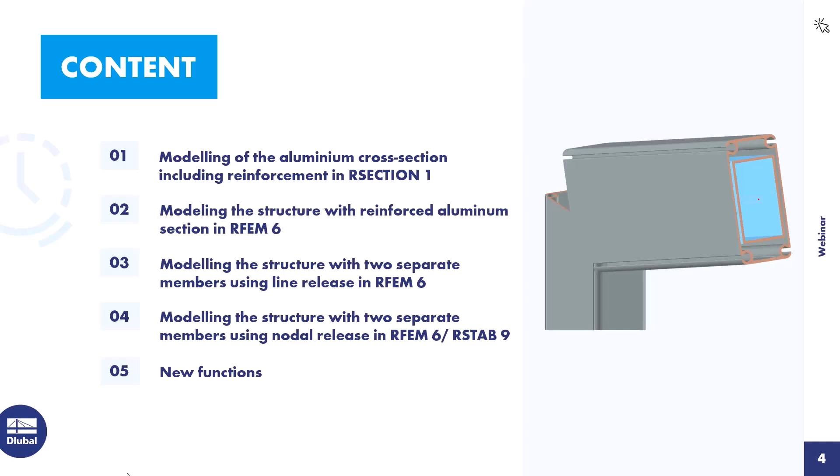This brings me to the first point, the modeling of the aluminum cross-section including reinforcements in RSECTION.

The cross-section geometry is available in DXF format, so I can use the import function. The creation of cross-sections based on DXF files was the subject of a previous RSECTION webinar. You can find this webinar on our website or on YouTube. There's also a knowledge base article on this topic on our website.

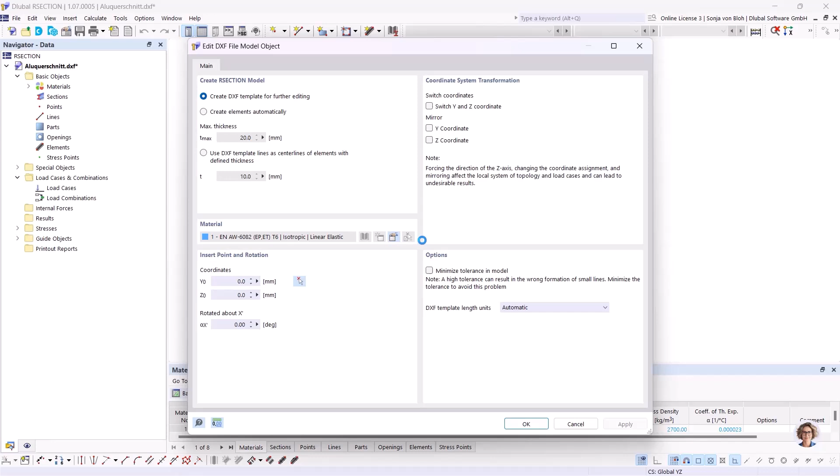I start the import process via File, Import, DXF. Then I choose the corresponding DXF file and click on Open. In the import dialog, I select the option Create DXF template for further editing, and then click on OK. Now the lines of the DXF file will be created in RSECTION.

I first create the part using the function select boundary. Here I have to define the material - I want to use the material that's already chosen in this box. Then I click on OK and click on the corresponding line. The part is now created.

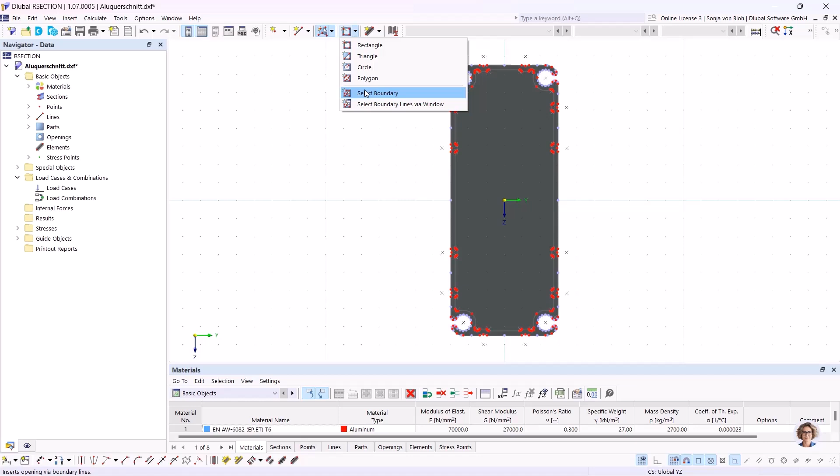Now I have to create the opening. For this, I select the function available for openings, select boundary, and then click on the corresponding line. I then deactivate the display of the parts and openings to get a better overview.

I then create the elements necessary for the classification and calculation of the effective cross-section. To do this, I only model a quarter of the cross-section, and then create the other parts by mirroring. To do this, I use the set centerlines function.

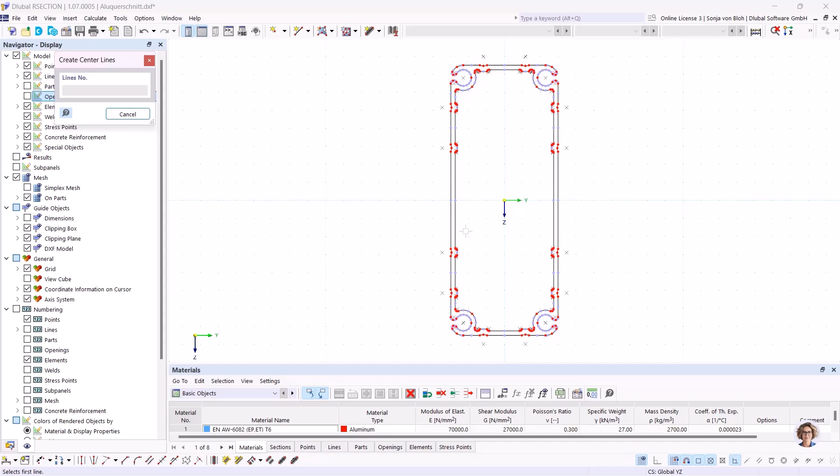I find this function here in this part. All I have to do is click on the two parallel lines, and the center line is then generated automatically. First I create the center lines for the flange, then for the arc, and then for the web.

The center lines then need to be extended. For this, I use the function extend graphically. Clicking on the left side of the line to be extended extends the line to the left; otherwise, to the right, until it intersects with the next line. I will extend this line to the left, and I also want to extend the center line of the web on both sides.

Since I only want to model a quarter of the cross-section, I trim the center lines accordingly. To do this, I use a function I find here called toLocation. This function makes it possible to extend or shorten a line to a specific location.

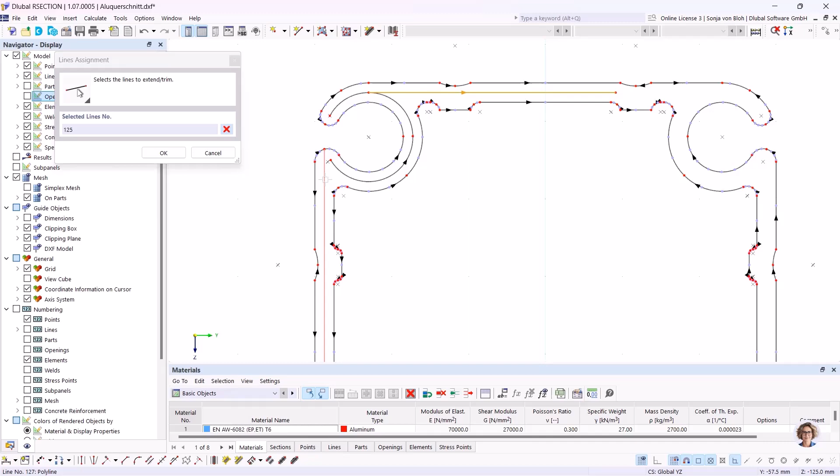I trim the center lines of the flange and the web to the center of the cross-section. To do this, I select these two lines, and then click on OK. I then have to specify the side of the line to be modified. The direction of the lines is shown on the working area. I have to shorten the end of the line, so I choose this option in the list box.

Then I have to define the location in this part here. I choose the 0 point here, and then I click on OK.

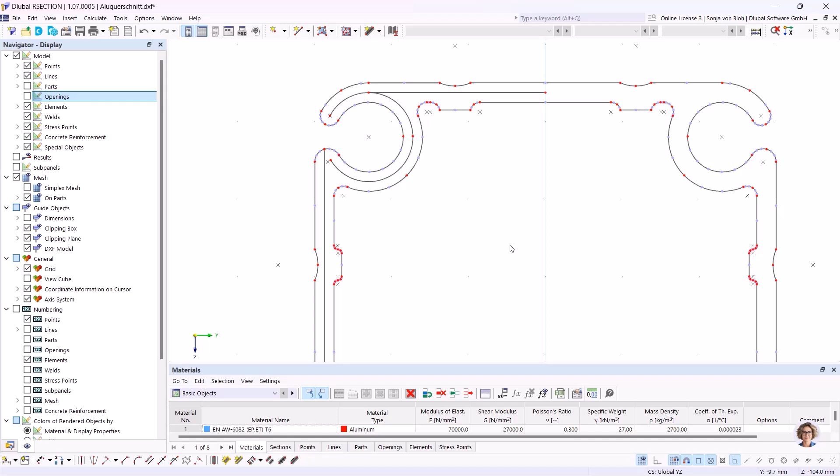Then the center line of the arc has to be connected to that of the web, and I make this connection with a straight line. For this, I create a new line and connect it here. I don't need this line here, so I delete it.

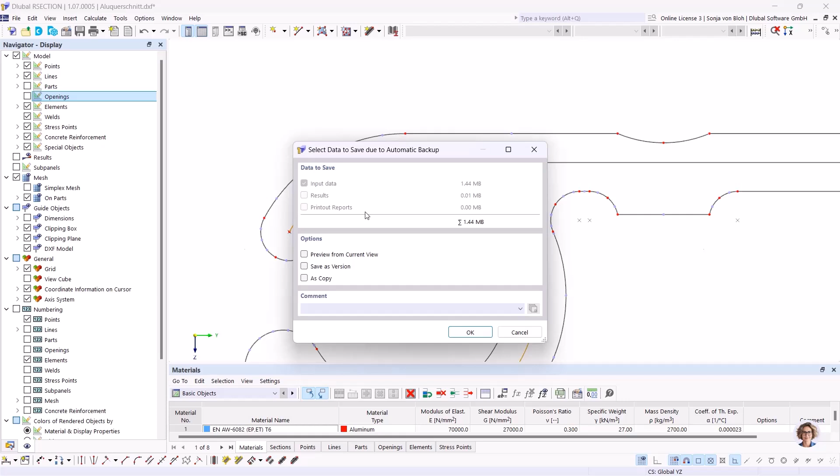Now, this line is not divided at this point, but this is necessary because elements are only connected if they share the same node. For this reason, I divide this line in this location. To do this, I use the function connect lines and elements, and I draw a window about this part, and now the line is divided at this point.

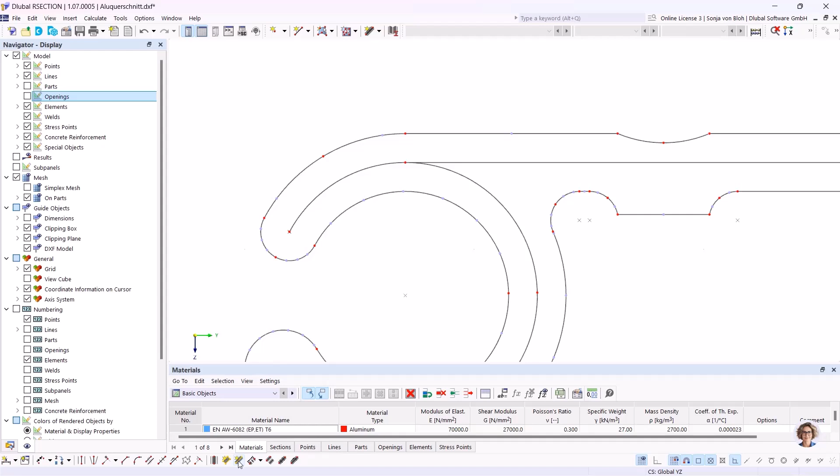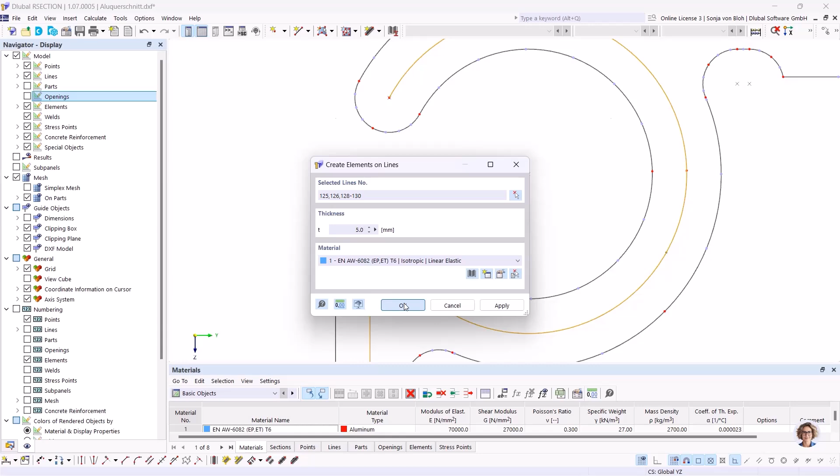I can now create the elements using the create elements on lines function. I find this function here, create elements on lines. All I have to do is select the corresponding lines. I select all the center lines. I click on OK, and then I have to define the thickness of the elements, and here I define 5 millimeters. Now the elements are created.

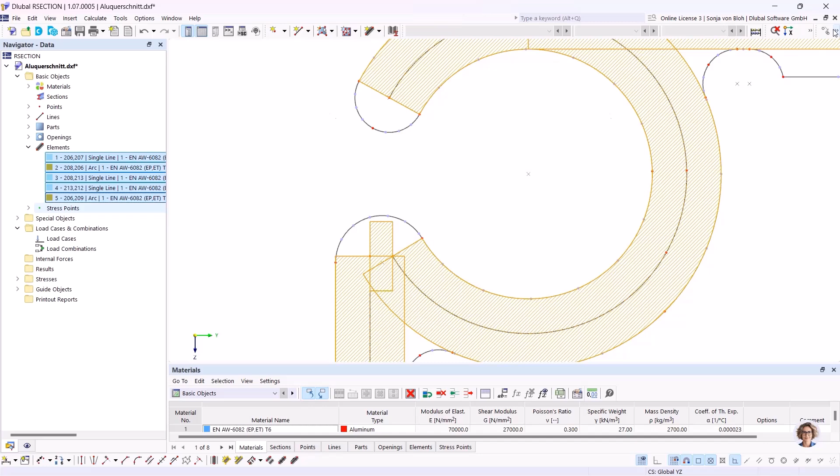I now select all elements here in Navigator Data, because I want to mirror them. For this, I choose this function mirror. I want to create a copy, so I activate this option. Then I have to define the mirroring axis. It's the axis Z, and the point, it's the 0 point. And I click on OK.

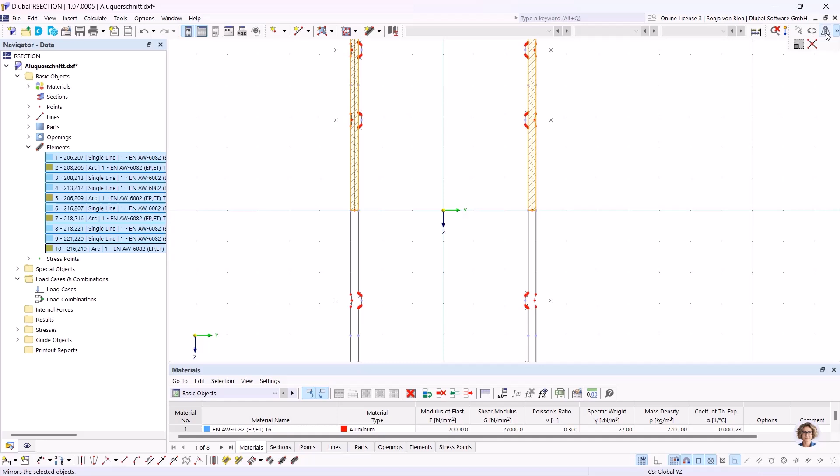Now the right part is created, and I need the part on the bottom. So I select all of my elements and I open the dialog mirror copy again, and I change here the mirroring axis to axis Y. And then I click on OK.

I then create the reinforcement. This consists of a welded rectangular cross-section made of S235 steel. I import this cross-section from the RSECTION cross-section library.

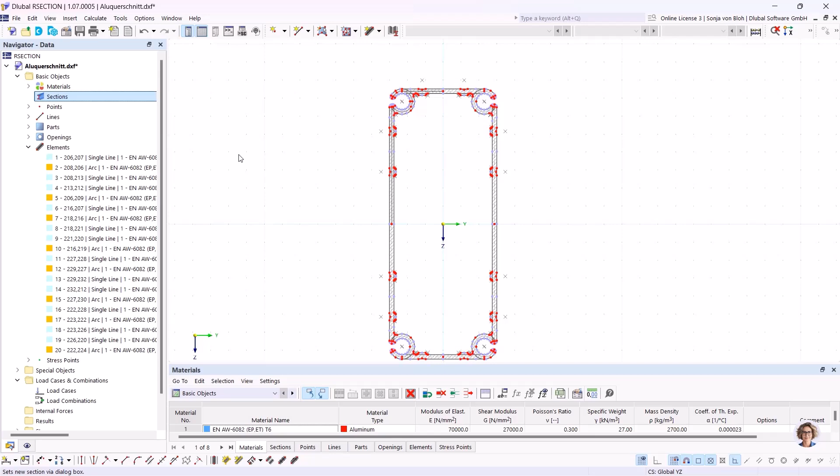To do this, I go to Navigator Data and choose here New Section. Then I open the section library and choose the rectangular hollow section. This should be a welded rectangular hollow section, so I choose here the manufacturing type welded.

I have also to create a new material. I want to use steel S235 for this cross section, so I create a new material, open the material library and choose here S235 from this standard. Click on OK.

OK, and then I have to define the geometry of this cross-section. Height is here 230 millimeters, and the width is 100 millimeters, and the thickness is 5 millimeters.

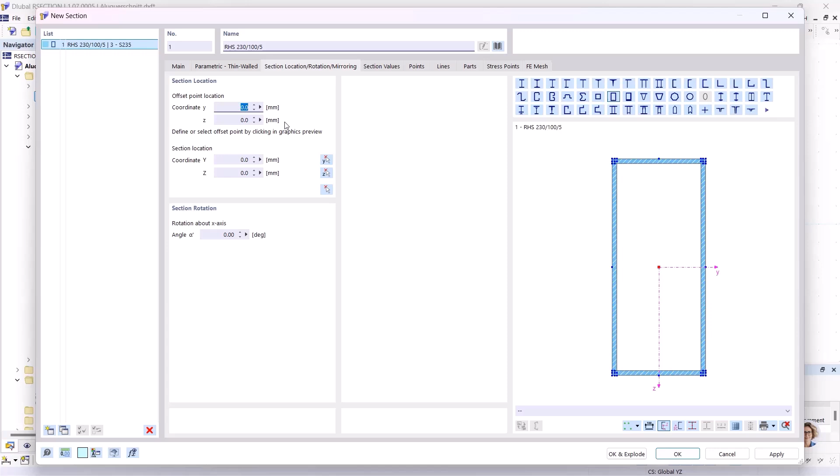In the tab section location rotation mirroring, I select here the 0 point as the insertion point, and I click on OK.

Only cross sections that are rigidly connected to each other can be imported into RFEM 6 or RSTAB 9. This connection is applied over the entire length of the member. If the cross sections are not connected to each other, the modeling presented here is not suitable. Two members would then have to be created in RFEM or RSTAB.

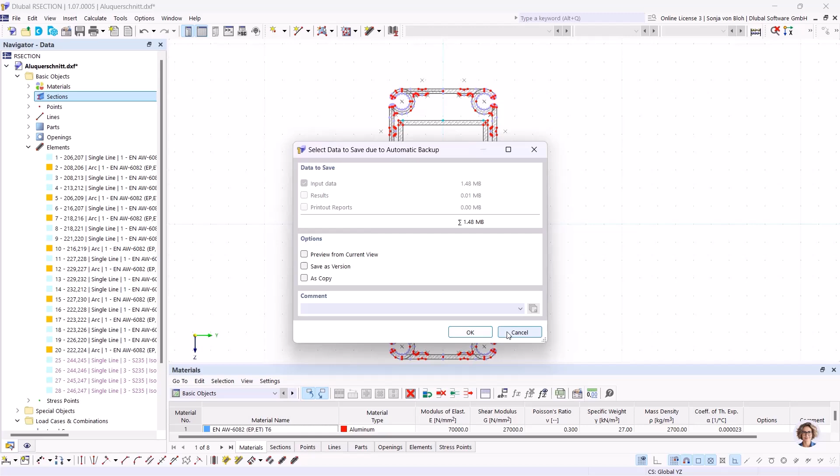As I mentioned at the beginning, I will also show this today. In order to connect the two cross sections, I have to explode the cross section into its individual objects. To do this, I choose here this cross section and choose here this function explode.

I create the connection between the two cross sections using an element with 0 thickness. To do this, I open here this function new element, define a thickness of 0 millimeters, and I have to also define an effective thickness for shear transfer, and this will be 5 millimeters.

Then I create the two elements.

In the base data, I open it here, I set the thin-walled analysis method. This is necessary because the connection of the two cross-sections was made using elements with zero thickness. These cannot be taken into account with a finite element analysis. The connection of the two cross-sections would have had to be made using parts.

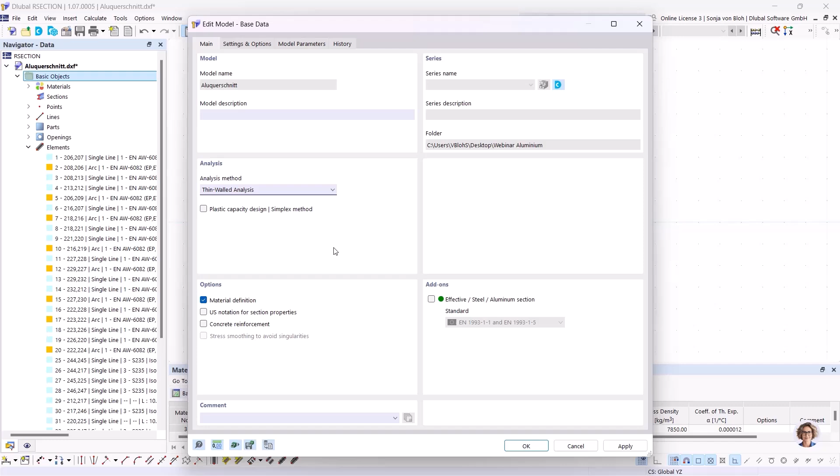It's advisable to start the calculation once in order to find possible modeling errors. Here, no errors will be found, so I save now this cross-section.

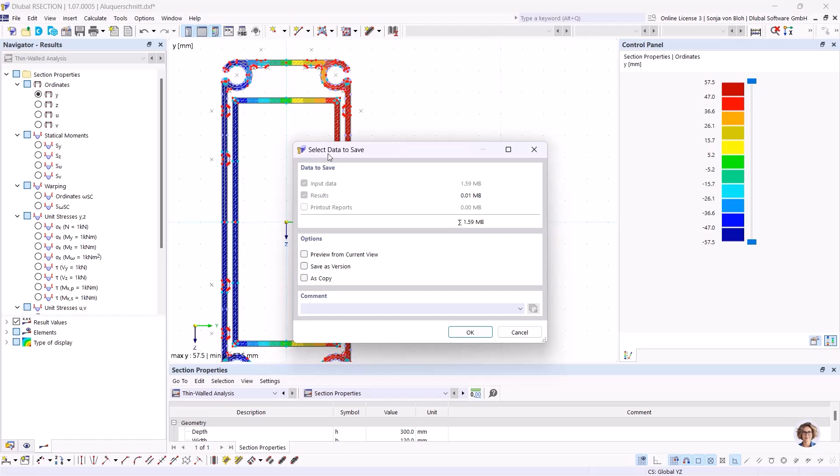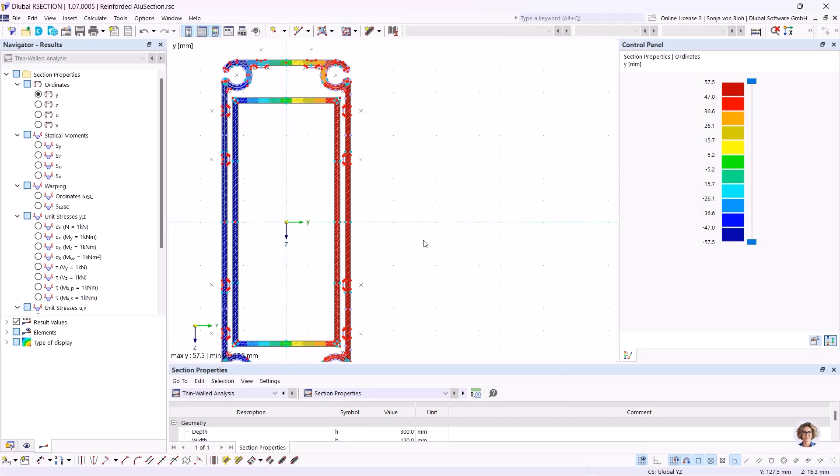I name it here reinforced Alu section. Then I can close this cross-section.

I now can model the structure in RFEM. So I open RFEM. Here I have already...

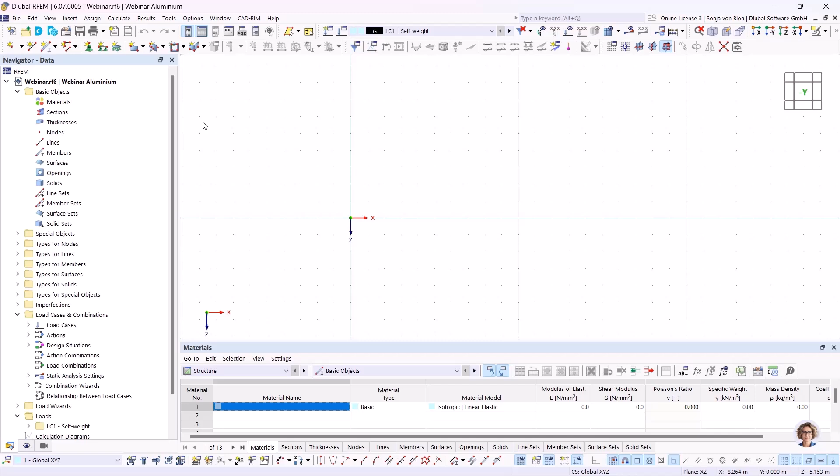Created a new file, and I have to import first the aluminum cross-section with the reinforcement that I've just created. To do this, I go to Navigator Data, choose New Section, open the section library from RSECTION, and I choose the reinforced aluminum section.

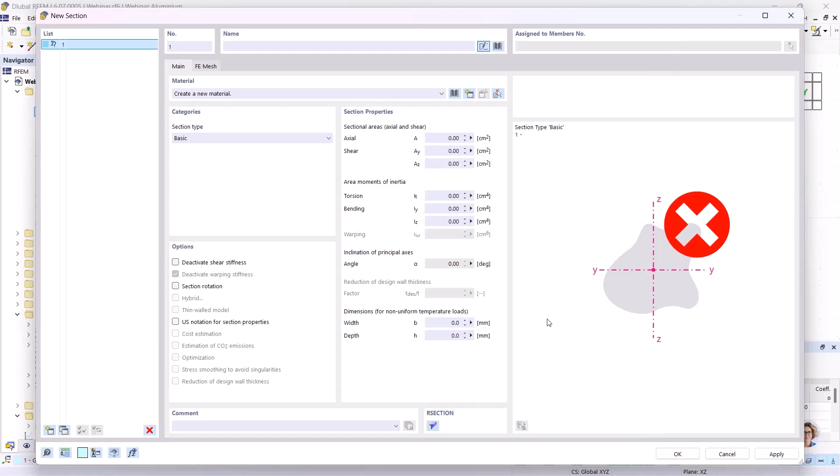I still need this cross-section without reinforcements, and for this I want to show you a new function in RFEM or RSTAB. It's now possible to open this cross-section in RSECTION and modify it, then import it again in RFEM or RSTAB.

To do this, I copy this cross-section and then I open this cross-section in RSECTION. In RSECTION, I then delete the steel cross-section and the connection between the steel cross-section and the aluminum cross-section.

Then I start the calculation again to see if there are any errors. There are no errors, so I can save this cross-section.

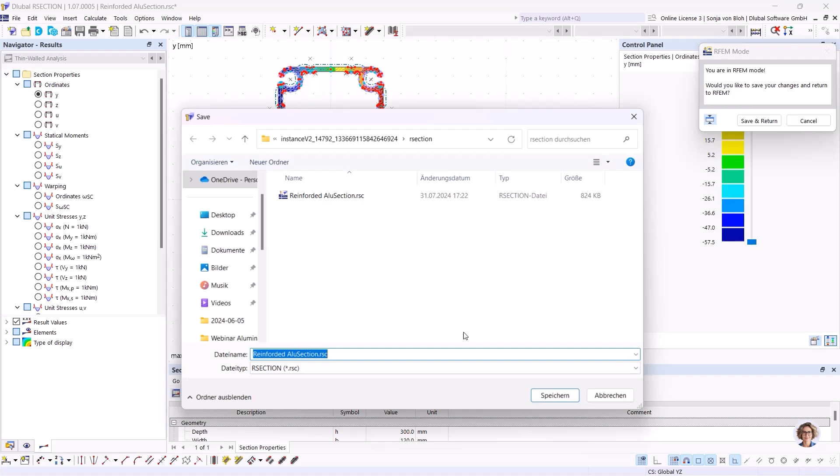I want to save this cross-section also on my disk, so I choose File, Save As, and I change the name to Alu section, and then I save this section on my disk.

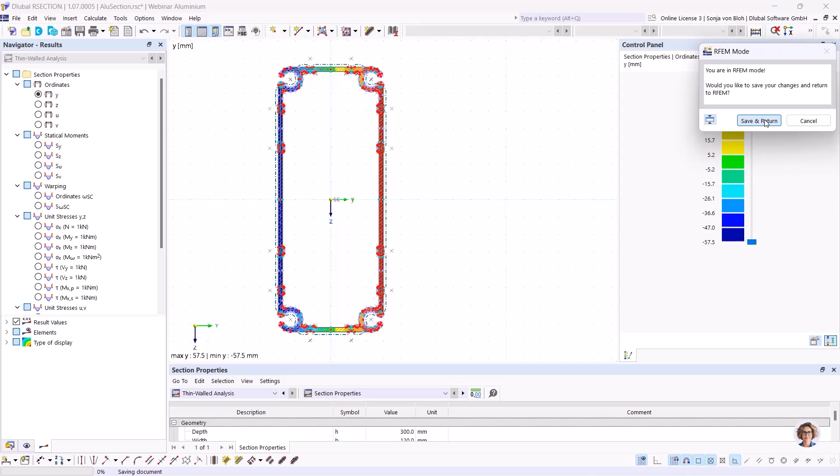Then I save this section. I go to Save and Return to RFEM, and by clicking Save and Return, I also apply this change in RFEM.

You can see now this cross-section is without this reinforcement, and this cross-section includes this reinforcement. If I had just clicked Save and Return, only the cross-section would have been changed in RFEM, but the original status of the cross-section would have been left on the hard drive. Then I click here on OK.

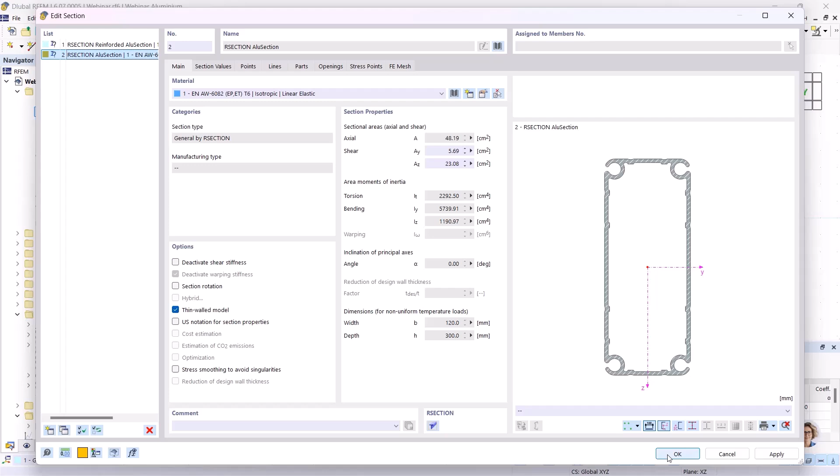I then model the column with the unreinforced aluminum cross-section. I choose New Member, choose the aluminum cross-section, and then I define the column with a height of 6 meters, and I model the beam with a length of 8 meters.

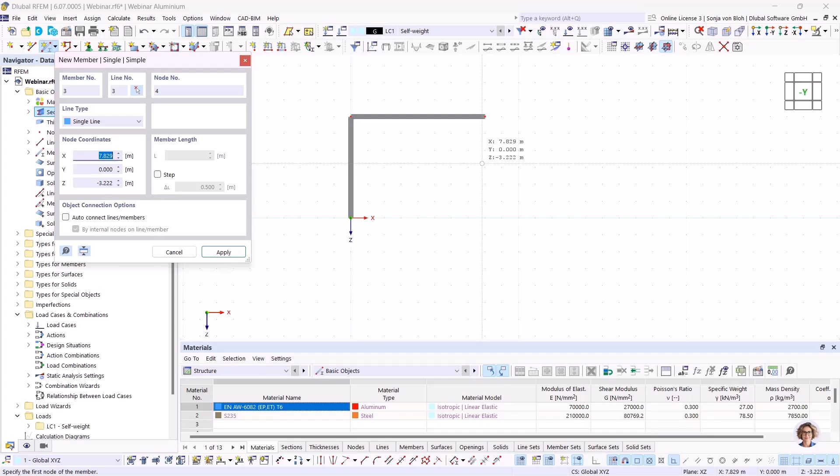The roof pitch is 18 degrees, so I use the function chamfer. I find this function in menu Edit, Manipulation, Chamfer.

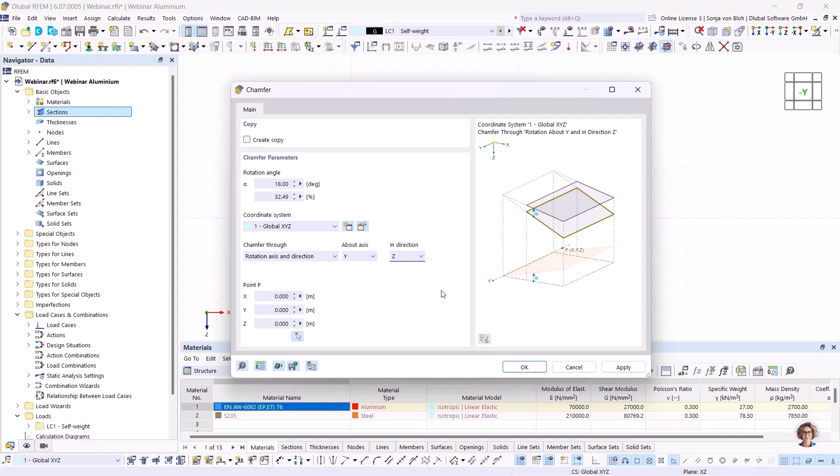Here I have to define the angle, the rotation angle of 18 degrees, and I have to define the rotation axis. This is the axis Y, and the rotation direction, and this is the direction Z. Then I choose the frame corner as the rotation point. Now this beam is rotated by 18 degrees.

The frame corner is reinforced with a steel overlength of 0.5 meter. I therefore divide the column with this function by distance, and here I define a length of 0.5 meter. Apply this, and I have to do this also for the beam.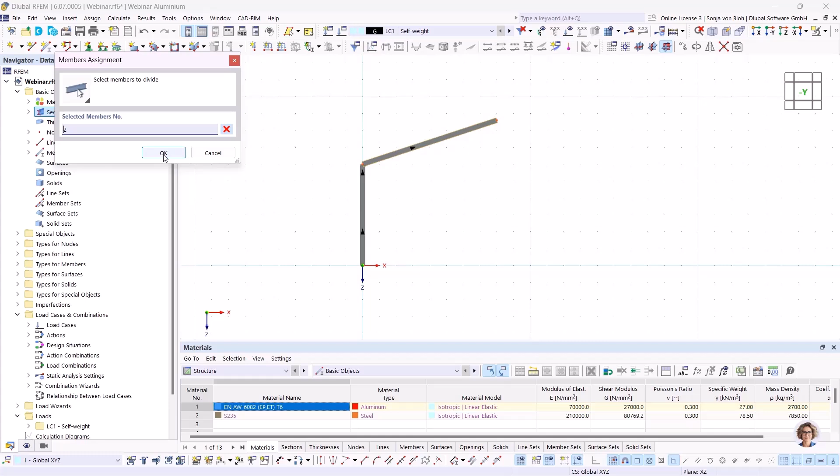But here on member start. Now the column and the beam are divided into 2 parts.

I then define hinged supports at the beginning of the column and the ridge. To do this, I assign a nodal support here, on the column and on the ridge.

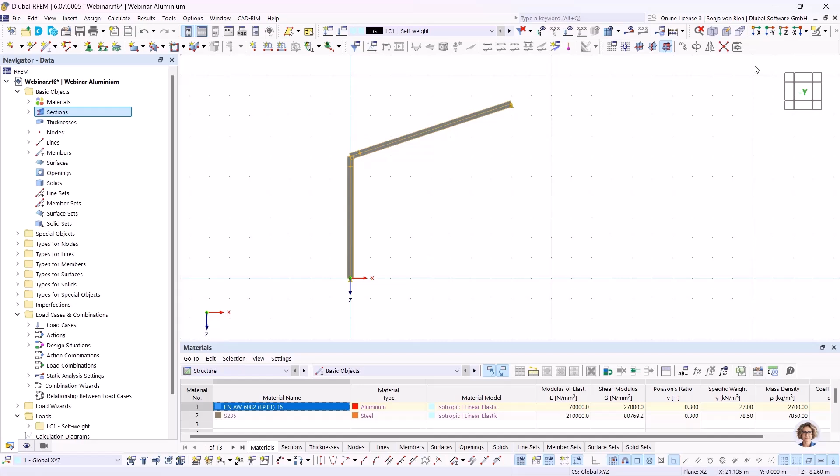Since I want to show different modeling options today, I copy the frame twice. I use here the move copy function and activate create copy. Number of copies is 2, and the displacement vector is 10 meters.

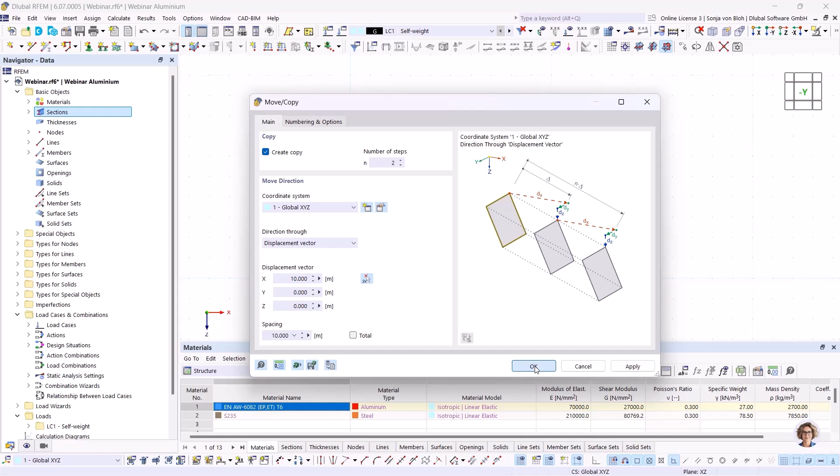First, I will show the modeling of the reinforced frame corner with the aluminum cross-section and reinforcement that I just created in RSECTION. To do this, I only have to change the cross-section in the frame corner.

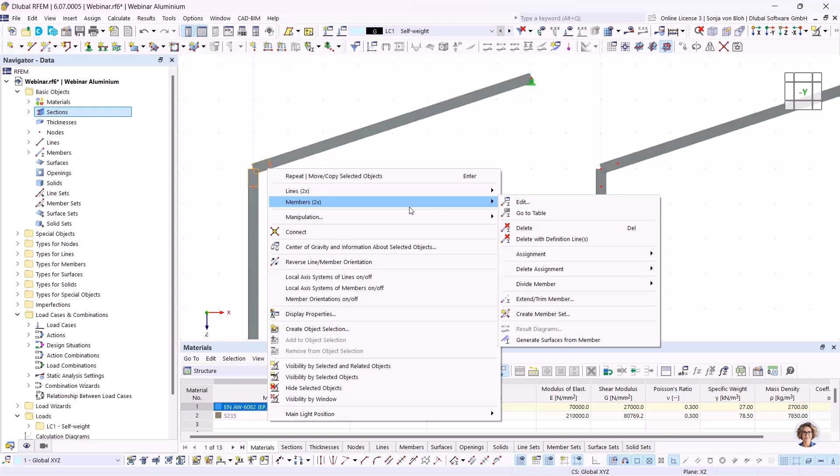I choose here the 2 members, choose Edit, and then I choose here the reinforced aluminum section.

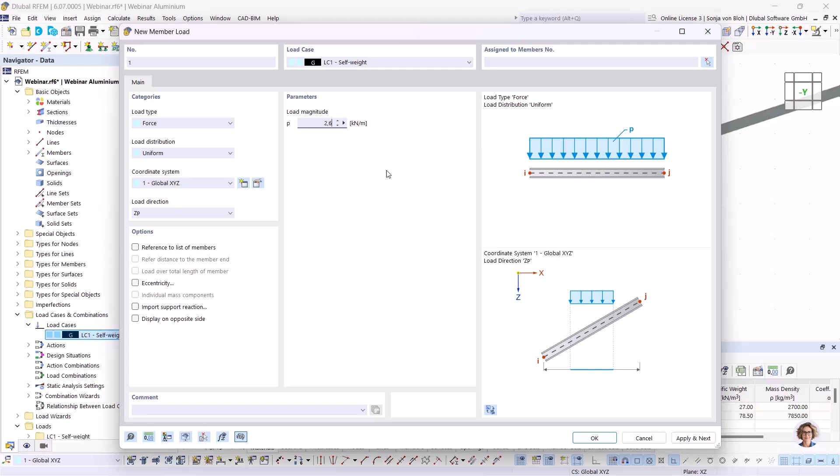Then I have to define the load. I do not want to consider the self-weight, so I deactivate the self-weight in this load case. And then I create the member load, here a load direction global in Z on projected length with a load magnitude of 2.6 kilonewton per meter. And I define it on these two members.

The disadvantage of this modeling is that it's not possible to design cross-sections with different materials in add-on aluminum design or steel design. However, the stresses can be determined in the add-on stress-strain analysis. In addition, I cannot define the coupling conditions between the aluminum and steel cross-sections.

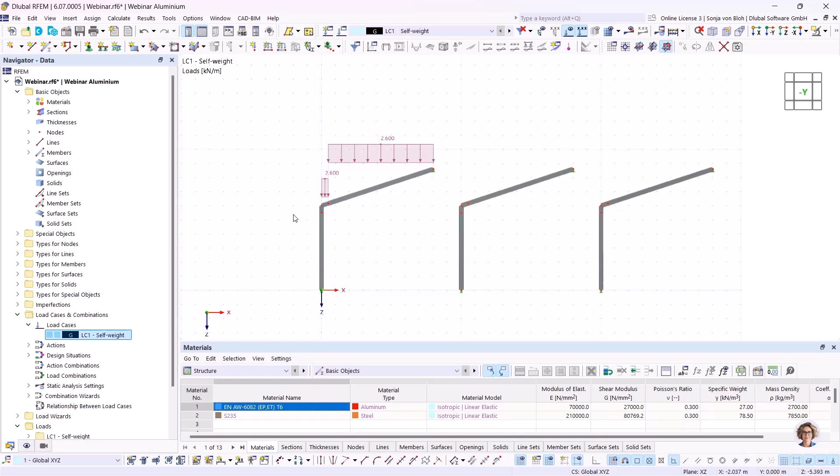So with this type of modeling, I cannot define that the aluminum cross-section is only slid over the steel reinforcement, and thus the steel cross-section only supports bending. The axial force here acts on the entire cross-section. If I start the calculation, I will see this in the internal forces.

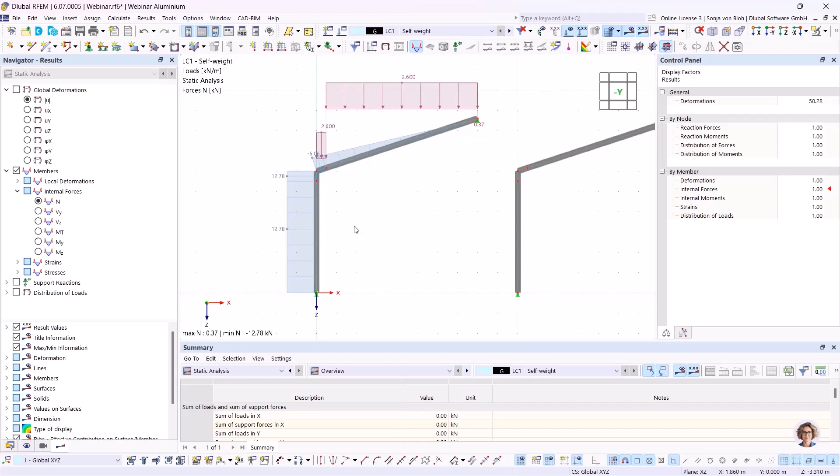Both mentioned disadvantages can be avoided by modeling two members. First, I would like to show you an option that is only available on RFEM: modeling using line releases. A line release allows the model to be decoupled along a line. I would like to show you the principle in my presentation.

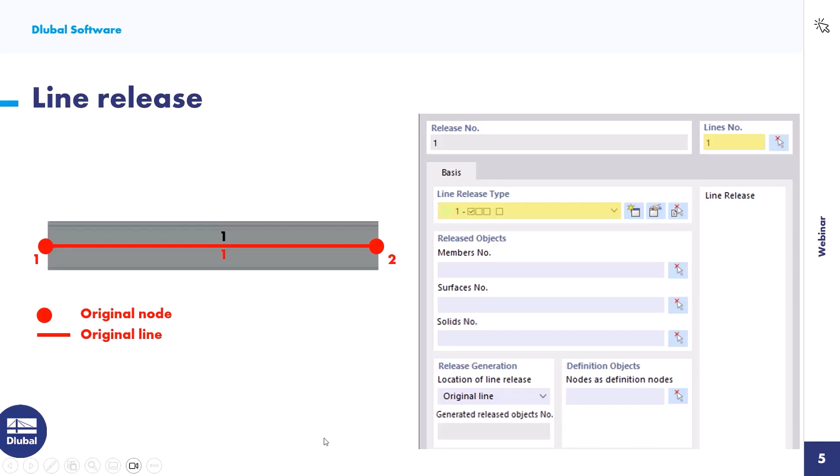The line releases create nodes 3 and 4, as well as line 2, which is defined via these nodes. The generated released objects are output in the release generation part here. The lines are coupled along their length using the hinge condition defined in the line release type, as indicated by the coupling bars shown on the graphic.

The position of the line hinge can be defined in the section release generation. It can be defined on the original line or on the released line. This is defined here on the original line, in this example line 1. The released line is automatically created with the corresponding nodes as a copy.

However, if you want to use one or more existing nodes for the generated line, you can specify the corresponding node numbers in the section definition objects. This affects the results because the displacements at these nodes are not released. For example, if you define nodes 1 and 2 as definition nodes, the released line is defined using the original nodes 1 and 2.

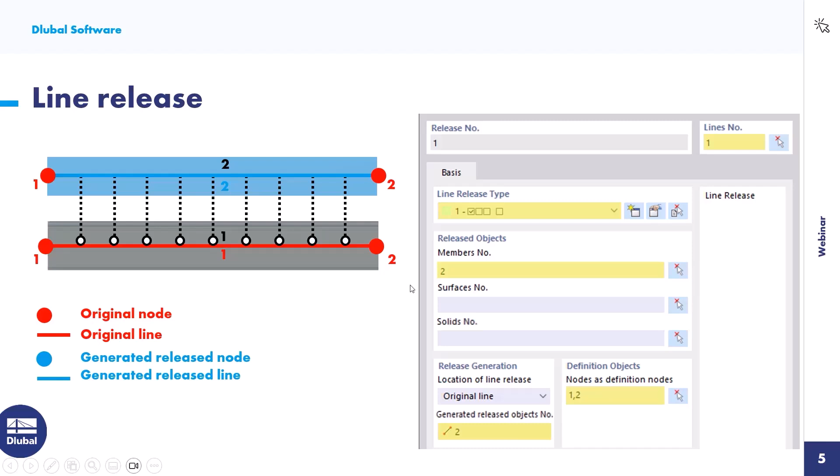I can now define the member on line 2 and then specify it as a released object. This is member number 2. I would now like to show you the modeling in RFEM. For this, I go back to RFEM.

First, I create a new line release. I go to Navigator Data and find the line releases under Special Objects, Line Releases. Here I create a new line release, then select the corresponding lines. These are lines 7 and 6.

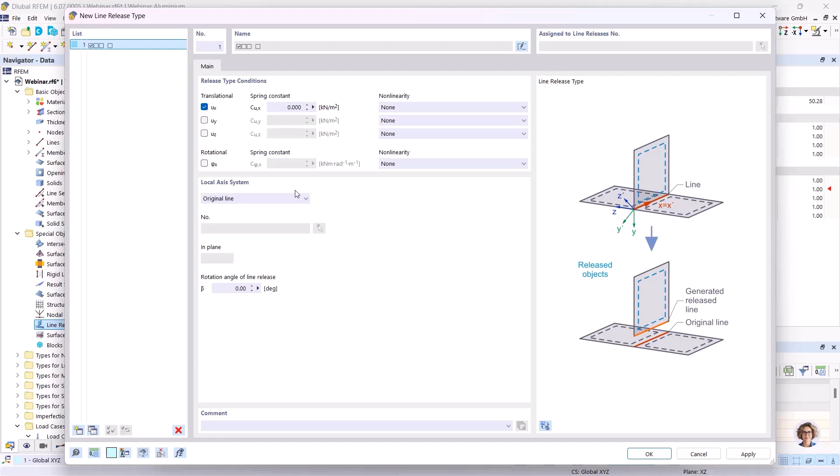After that, I create a new line release type. The displacement in the X direction should be released here. Click OK, and this line release creates lines 13 and 14 on the release nodes 16 till 18.

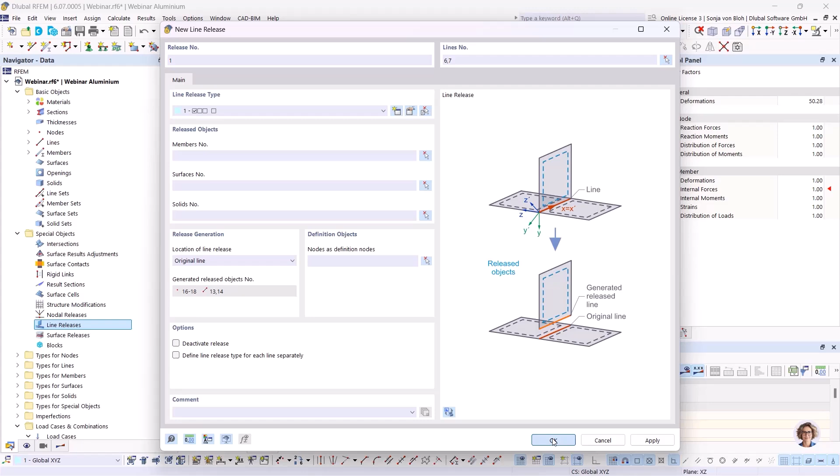On lines 13 and 14, I open it here in the Navigator Data. I now define the reinforcement cross sections. To do this, I choose the two lines, click on Edit, and I apply a member on these lines.

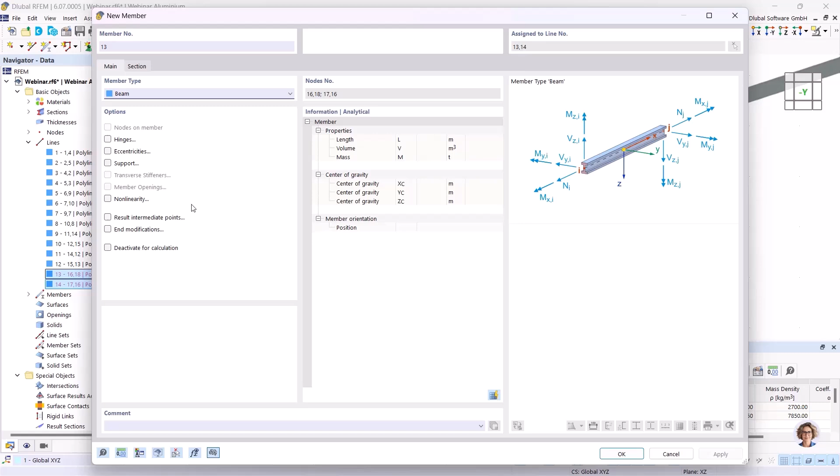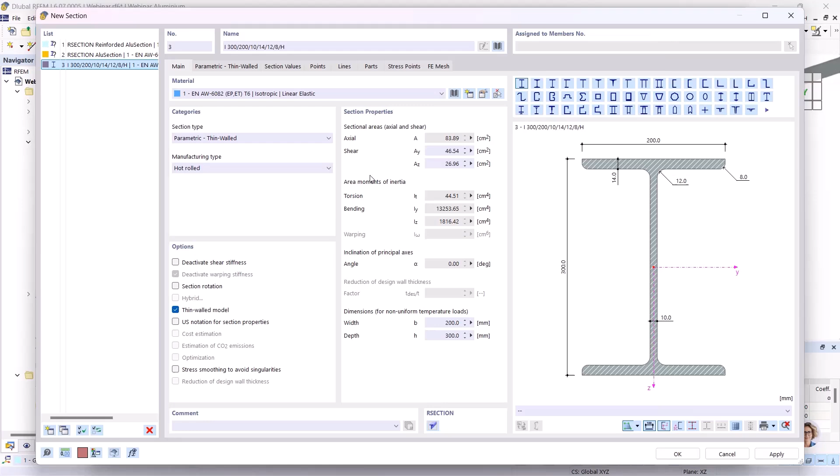I have to create a new cross section, and this should be the welded rectangular hollow section. To do this, I open the section library, choose rectangular hollow section. This section should be welded, so I choose the manufacturing type welded and the material S235. Now I have to define the geometry.

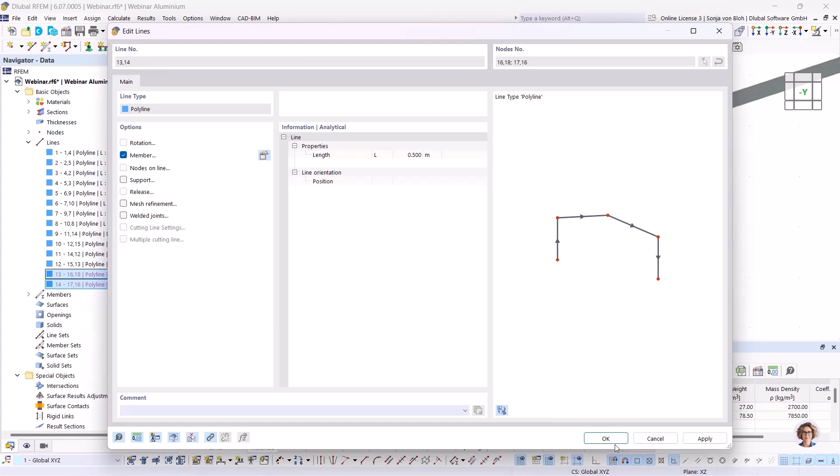The height is 230 millimeter, the width is 100 millimeter, and the thickness is 5 millimeter. Then I click OK, and now the member is applied on this line.

To ensure that the aluminum cross sections are all connected to one another, they must be defined using the original nodes. The steel cross sections must be defined using the released nodes. I control this using visibilities.

For this, I go to the Navigator Views, and first I will show here the steel cross sections. These are defined using the release nodes, and the release nodes have a blue color.

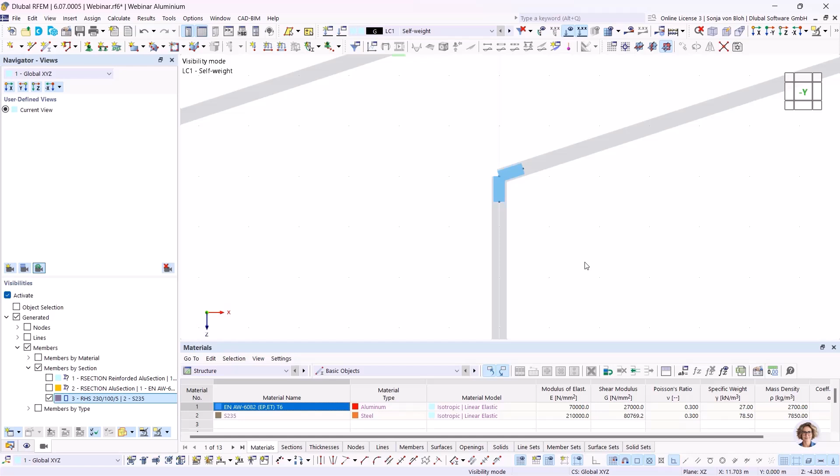If I move the mouse over the node, a reference to the associated line release is also displayed, as you can see here. Then I only show the aluminum section, and the aluminum sections are only defined using the original nodes, which have a red color.

Since the aluminum cross-sections are only slid over the steel reinforcements, I still have to define member hinges on the aluminum cross-sections at the frame corner here. For comparison purposes with the other structure, I will not show this today.

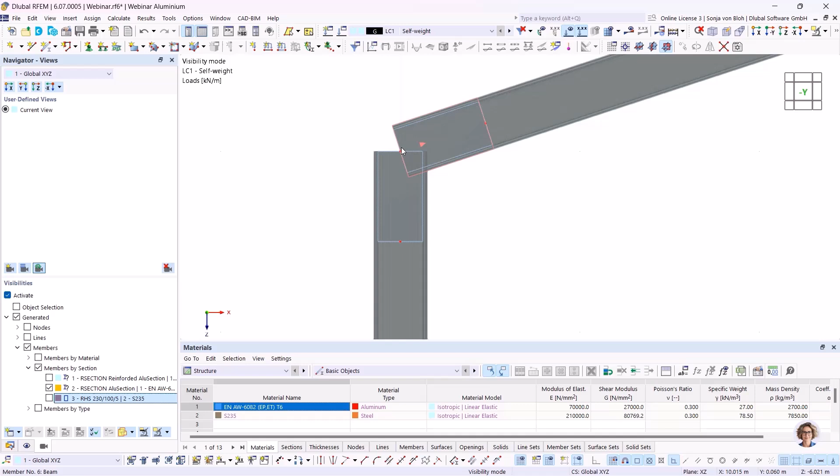I then define the member load of 2.6 kilonewton per meter on the aluminum beams. To do this, I choose the new member load and define it on these beams. Then I start the calculation.

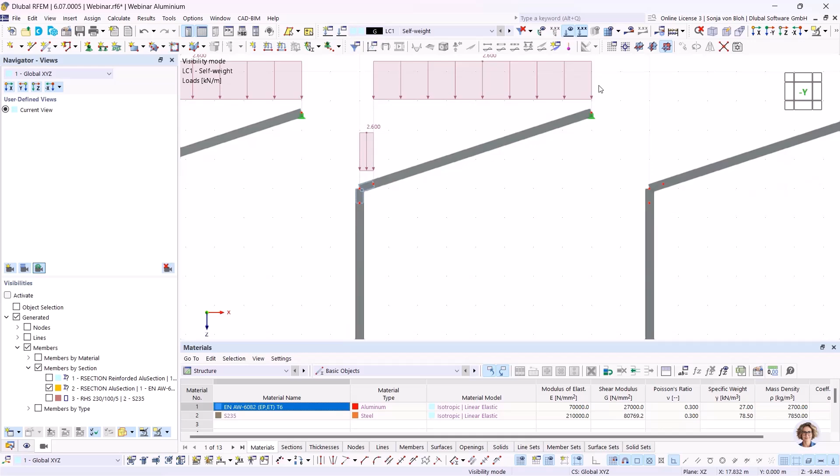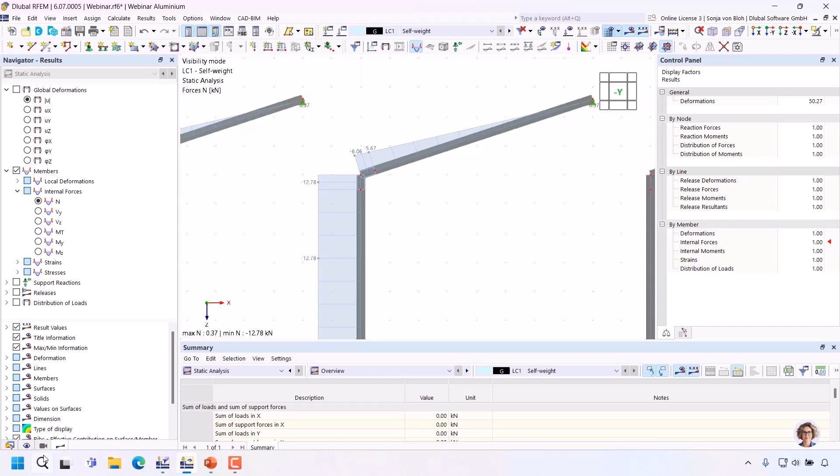I first look at the axial forces, and the axial force is applied only on the aluminum cross-section. If I show here the steel cross-section, I see that no axial force is applied here. This is because we have defined the line release with the release in X direction.

Then I show the bending moments here on all cross sections, and then I see here the bending moments are applied to both members via its stiffnesses. The bending moments are applied on the steel cross section and on the aluminum cross section.

As already mentioned, line releases are only available in RFEM. However, modeling with two separate members is also possible in RSTAB. Nodal releases are available for this in RSTAB. You can also use nodal releases in RFEM. I would like to show you the principle in my presentation.

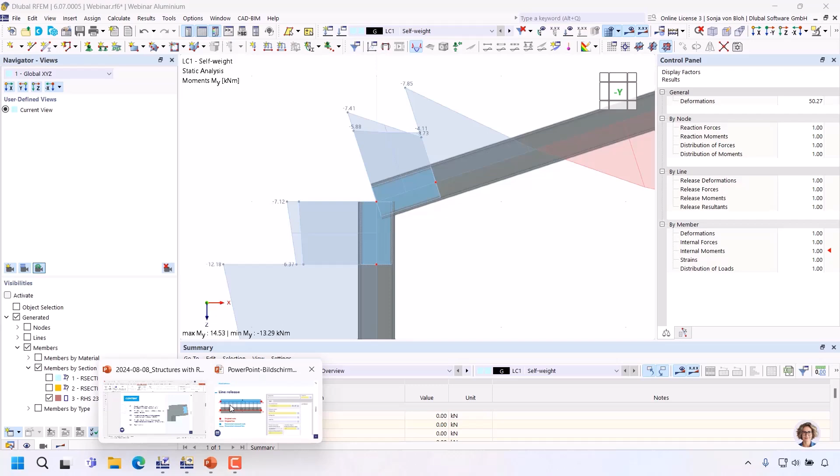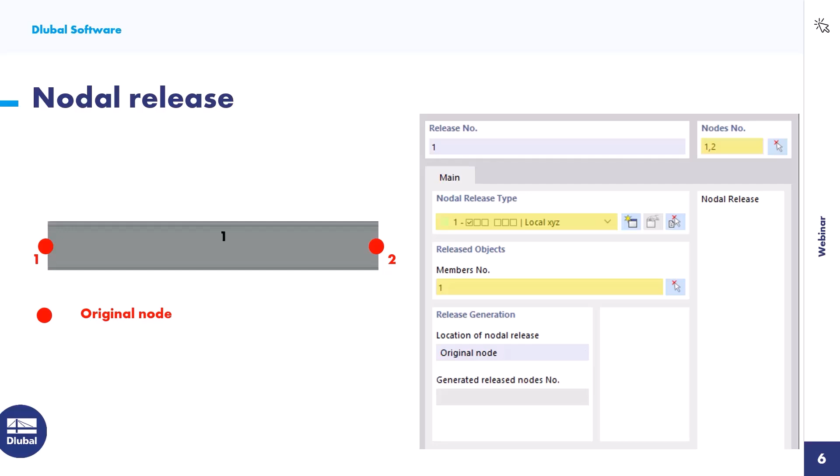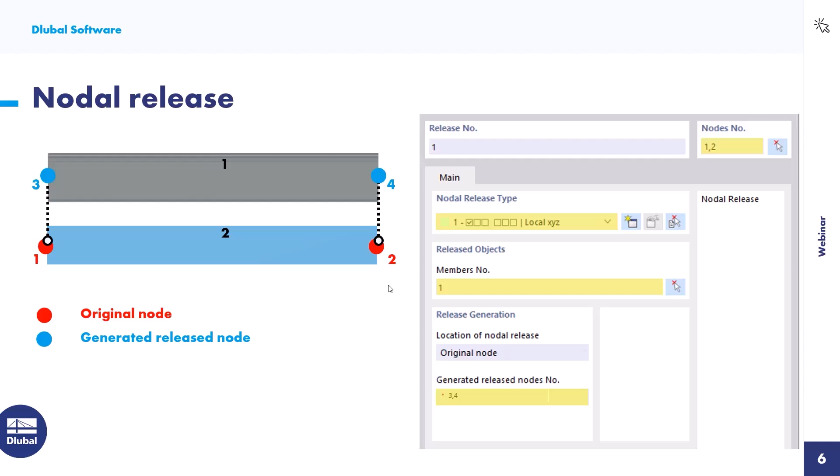I would now like to show you the modeling in RFEM. For this, I open RFEM again. First, I have to create the new nodal release. I go here to the navigator data and I find the nodal releases here under special objects, and I create here a new nodal release.

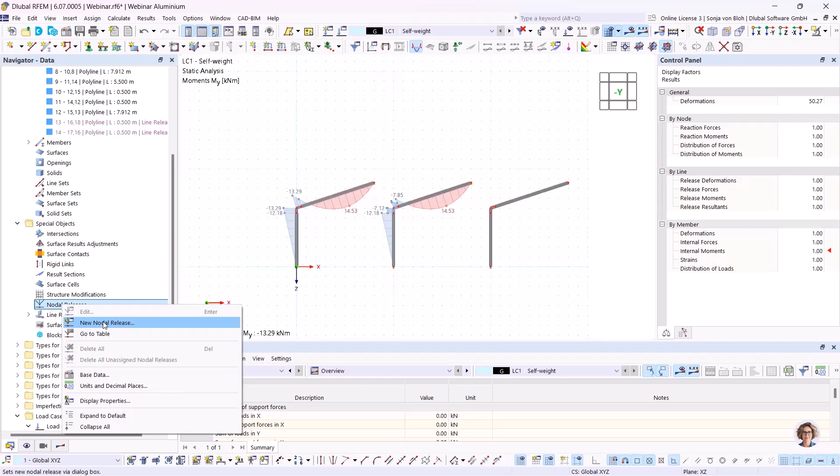Then I select the corresponding nodes. These are the nodes 14, 12, and 15. The nodal release type should be defined separately for each node because the reference axes are different. So I activate here this checkbox, define nodal release type for each node separately.

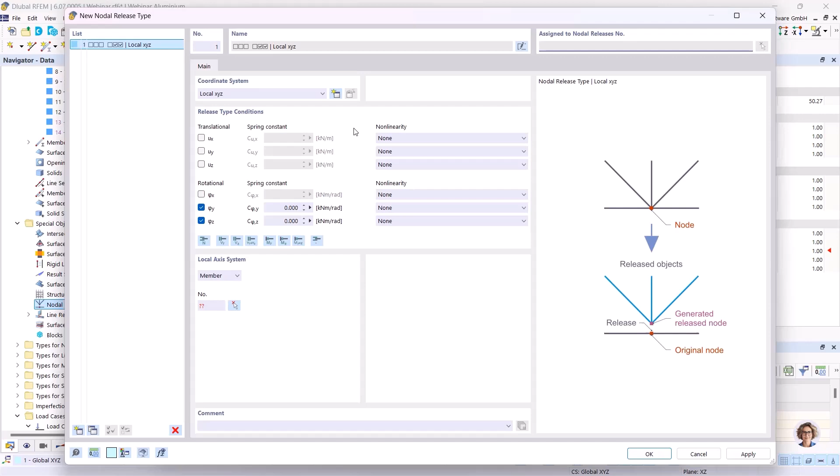Then I go to the tab nodal release type, and here I have to create a new nodal release type for this node 12. And here, once again, the displacement in X direction should be released. Then I have to define the local axis system, and I choose here the local axis system from this member. This release should be also used for node number 15. And for node number 14, I have to create a new nodal release type. Release is also in X direction, but the member is here, the member number 9.

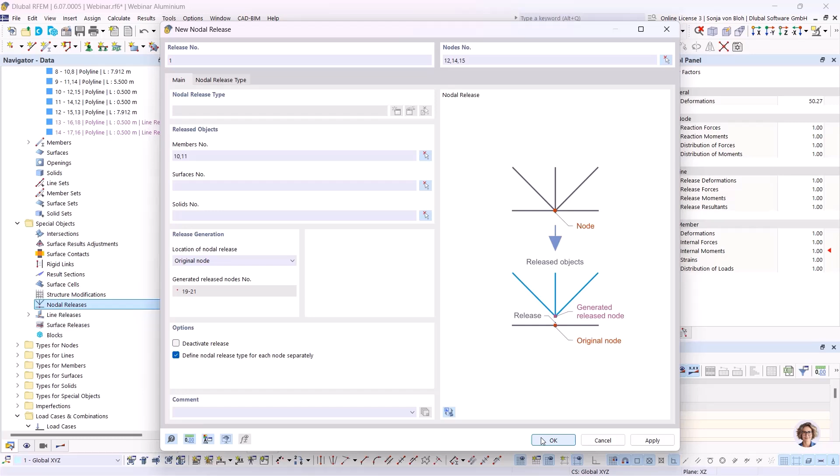Then I have to define the released objects, and these are the objects 11 and 10. The generated release nodes are 19 till 21. Then I click on OK. The released aluminum members are now defined via the released nodes and no longer via the original nodes.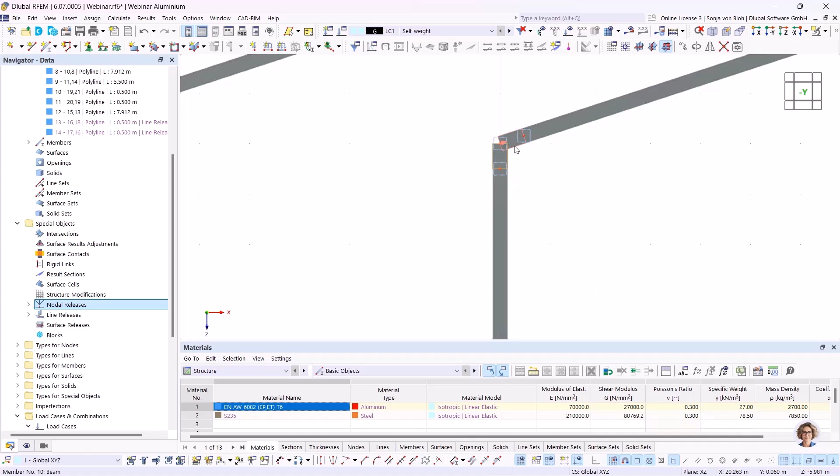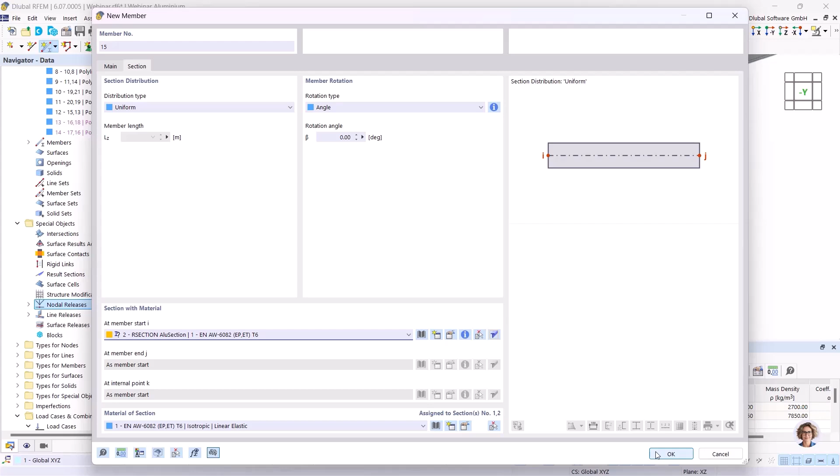In order for the aluminum cross-sections to be connected to one another, they must all be defined via the original nodes. Therefore, I now change the cross-section of the released members. I choose here Edit to the steel cross-section. I then define the aluminum cross-sections between the original nodes. To do this, I open here the new member, choose here the aluminum cross-section, and then I choose here the original nodes for the definition.

I check this again using the visibility. For this, I open the navigator views and activate the visibility for the steel cross-sections. The steel cross-sections are defined via the release nodes. Release nodes are colored in blue. I can see it here, and if I move the mouse over the node, I see this is a node created via a nodal release.

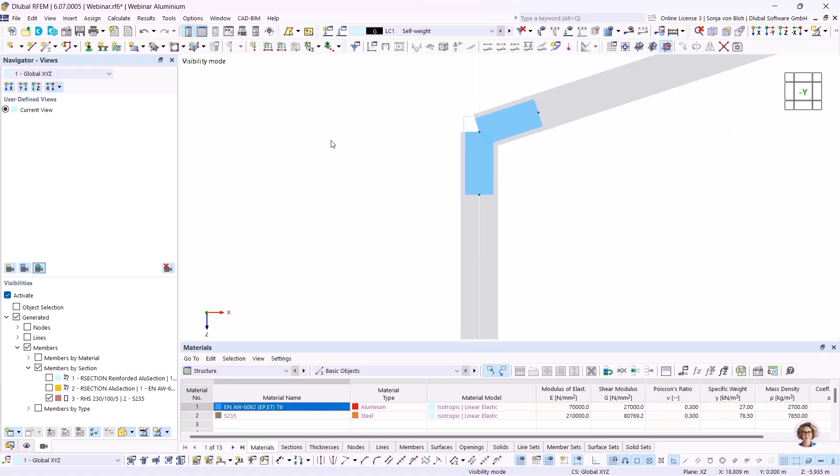Then I show the aluminum cross-sections only, and these are defined via the original nodes. The original nodes have a red color. I can see it here if I move the mouse over the node.

Since the aluminum cross-section only slides over the steel reinforcement, I still have to define moment hinges on the aluminum cross-sections in the frame corner. As I mentioned before, for comparison purposes with the other structure, I will not show this today. I then define the member load on the aluminum beam with the same load magnitude, and then I start the calculation.

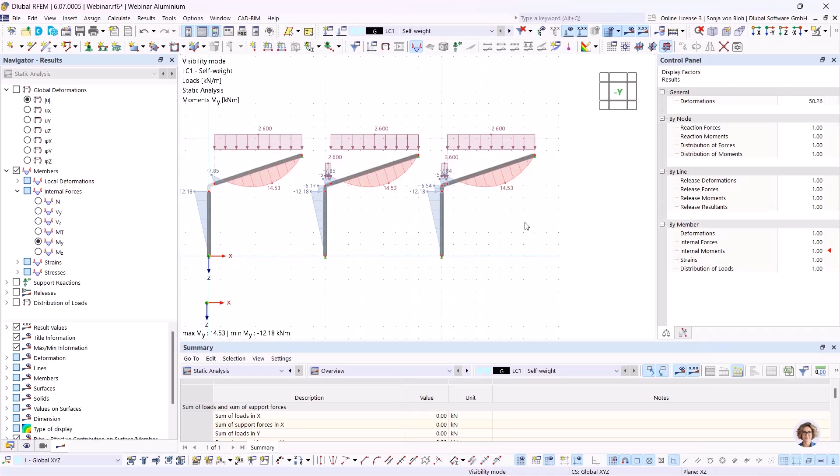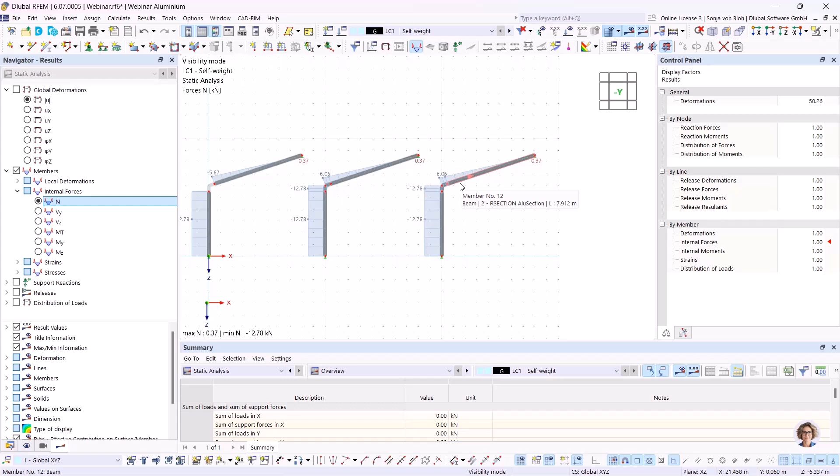I first look at the axial force. Due to the hinge defined in the line release in X direction, the axial force is only transferred via the aluminum cross-section, you can see it here. If I show the steel cross-section, no axial force is applied here.

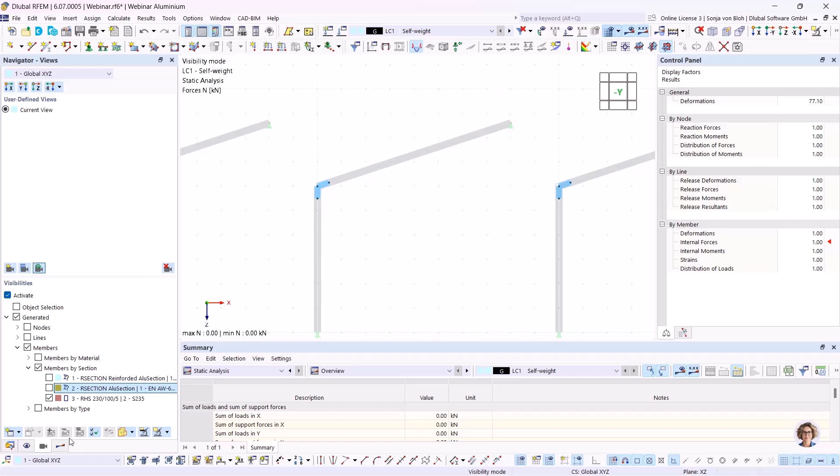The steel cross-section also contributes to bending. I will show you this also. If I show here the bending moments My on the whole cross-section, you see that both members have a bending moment.

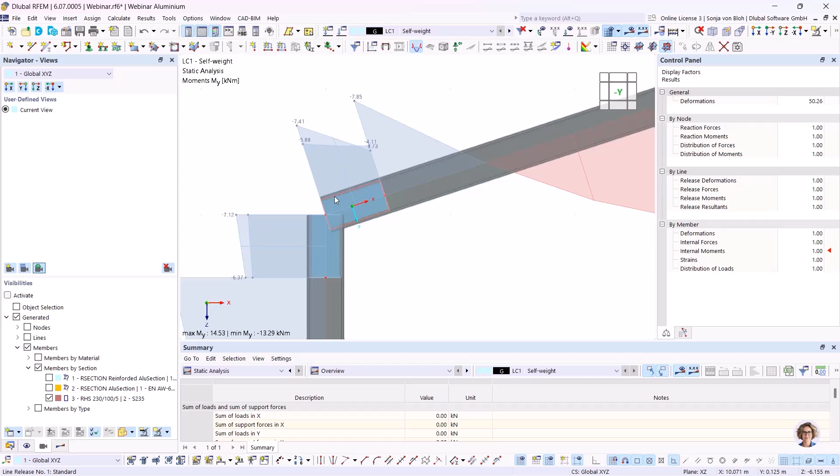This brings me to the last point of today's webinar, the new features. You can now also read results such as the member sec from the dimension. To do this, a linear dimension must be defined on the member. I now define a linear dimension on the beam.

To see the results here also, I have to go to the navigator results, and I have to activate under dimension the results on member. If I want to see the deformation, I activate the global deformation, and I see the result here on the dimension related to the deformed system. A member sec corresponds to the largest dimension of an imaginary line between the deflected beginning and end of the member section.

The supports are very stiff, so the member sec differs only slightly. Here the member sec is 24.1 millimeter in comparison to the global deformation of 24.2 millimeter.

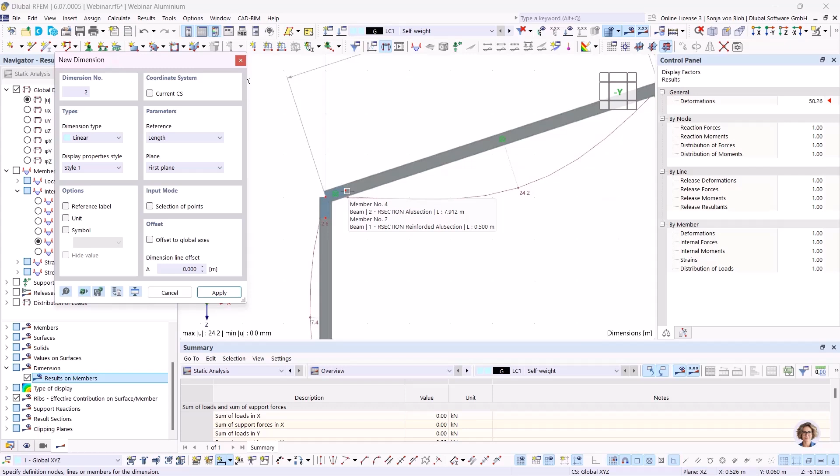If I define a dimension between the end of the reinforcement and the end of the beam, the difference will be clearly visible. I do it here, choosing the two nodes. You can see here the sec deformation is now 22.5 millimeter in comparison to 24.1 millimeter for this section here.

Another new function allows you to examine the stresses within members using clipping planes. Clipping planes are cutting planes that you can freely place through the model. The area in front or behind this plane is shown transparently in the view. Predefined clipping planes can be used for this, and you find them in the navigator data, under guide objects, clipping planes. We have here three predefined clipping planes.

However, it's also possible to define user-defined clipping planes. I want to activate the clipping plane, so I choose clipping plane on. And I want to examine the normal stresses here in the member, so I choose the display of the stresses.

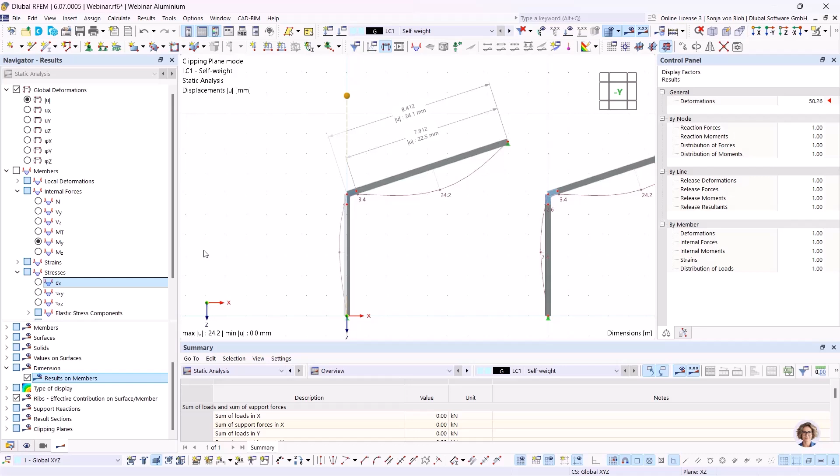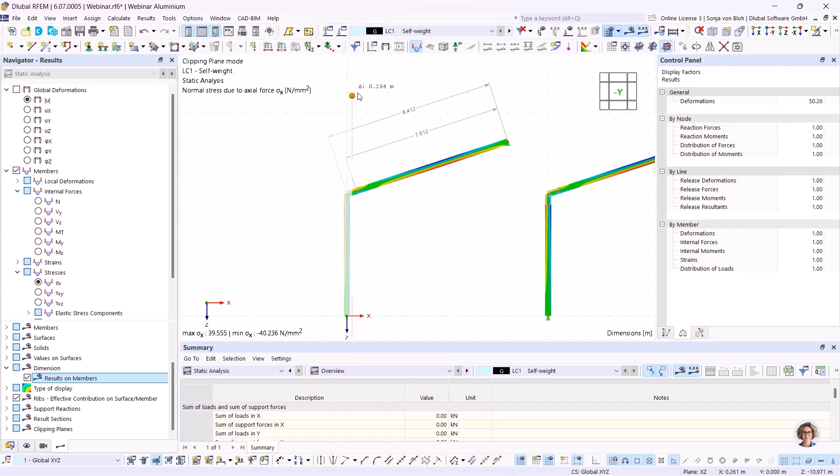I can then move the clipping plane to the desired location with the mouse via these. I can see now the stresses here in the cross section, and here in the cross section of the unreinforced part.

This brings me to the end of the webinar. I will now hand the floor back to Andreas.